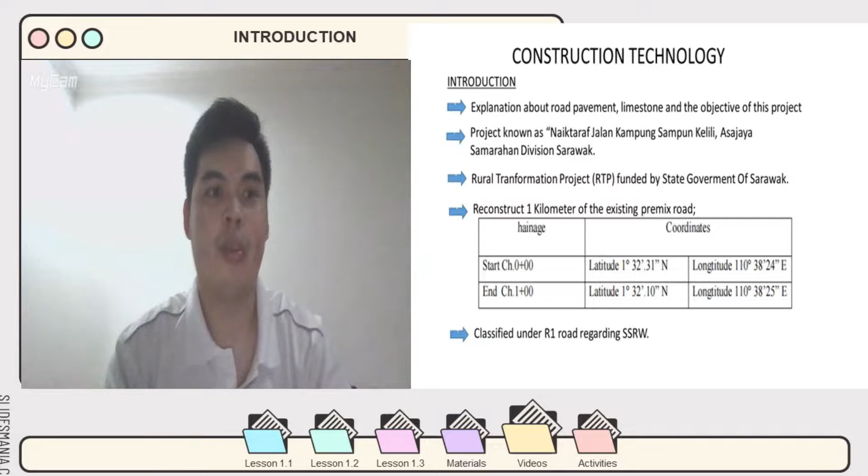Next, I will talk about the project description. This is a construction of an existing 1 kilometer R1 one-lane single carriageway road serving the local traffic with no access control, connecting Kampung Sampun Kelili to Kampung Jugu. As for the road dimension, it consists of 1000 meters times 5 meters, which is 1 kilometer by 5 meter width of road.

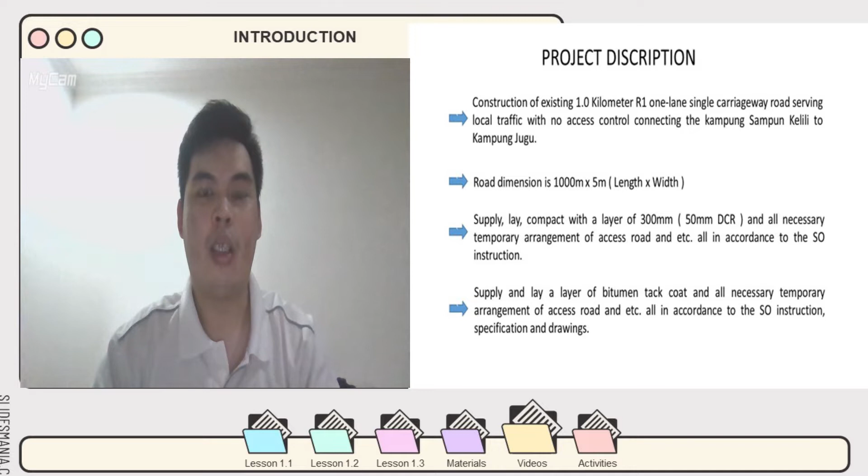To supply, lay and compact a layer of 300 mm 50 mm DCR and all necessary temporary arrangement of access road, etc., all in accordance to the SO instruction. Supply and lay a layer of bitumen tack coat and all necessary temporary arrangement of access road, etc., all in accordance to the SO instruction, specification, and drawings from the consultant which is elected. Next, I would like to pass my slide to Madam Gostia.

Literature review. The purpose is to give more thorough understanding regarding the physical and chemical properties of the limestone, and give an in-depth inside look of the pavement and the specification that they have met in the same way that specifications have been drawn up for road making material already in use. Number 1, limestone. Sedimentary rock that is mostly composed of calcium carbonate and is a bedded carbonate rock. Alkaline with pH of 12.4, utilized in a wide range of industrial applications, including water treatment, asphalt, anti-stripping, and soil stabilization.

Number 2, formation of limestone. Limestone is made up mostly of calcium carbonate formed on the seabed from the remnants of seashells and other marine animals. These animal remnants create hard beds rich in calcium carbonate. As a result of heat and pressure, this process changes the calcium carbonate in limestone, resulting in marble.

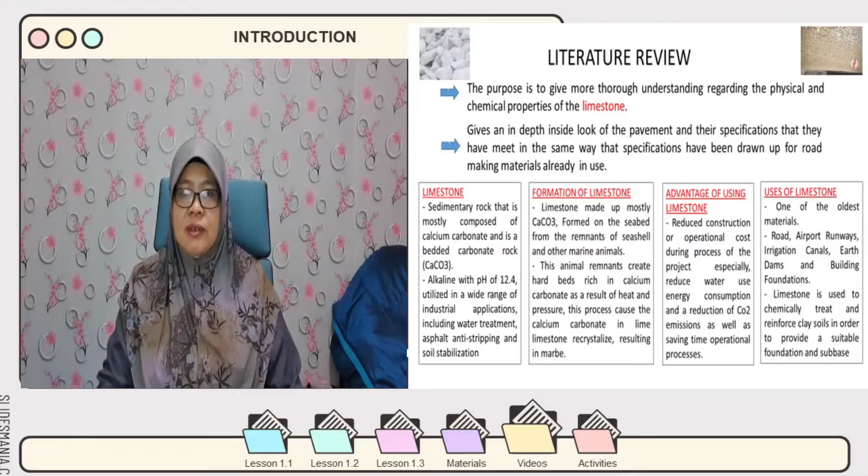I'm Jason Josh. I would like to continue the next topic for our project, which is about potential impact. There are two types of impact. The preliminary impact is a pre-construction impact. This stage is land acquisition involving private-owned land, which potentially affects the socioeconomy and livelihood of the local community in the areas. So land acquisition, as we know, is sensitive and needs to be dealt with

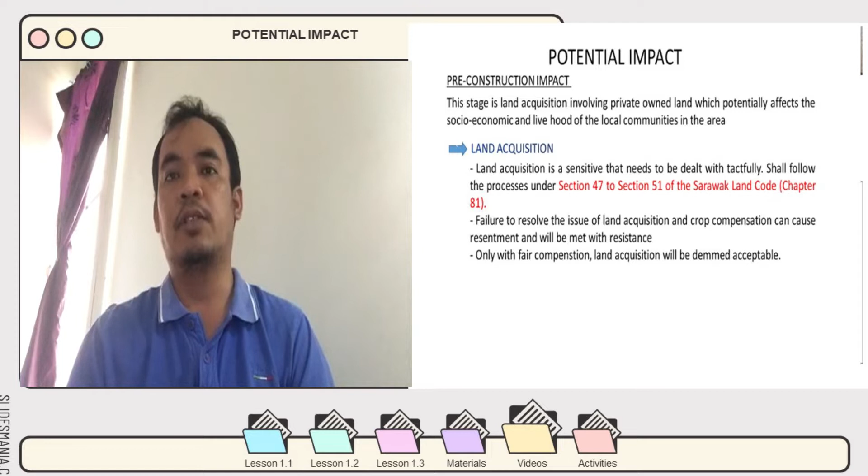tactfully. So when dealing with this issue, we shall follow the process under section 47 to section 51 of the Sarawak Land Code, Chapter 81. For every land acquisition we must refer to this Sarawak Land Code to resolve the problems regarding land acquisition. Failure to resolve the issue of land acquisition and crop compensation can cause resentment and will be met with resistance. So only with fair compensation will land acquisition be deemed acceptable.

During construction, the severity and magnitude of impact shall be assessed based on acceptable matrix, taking into account all possible impacts such as short-term, long-term, and accumulative effects. To assist in the assessment of specific impacts, appropriate mathematical and software models shall be used where necessary.

There are several impacts that our group have highlighted. One of it is air pollution. Air pollution in the form of fugitive dust emission can occur during land preparation, such as earthwork, and during construction. For this project, there are several principal project activities during the construction stage that could be potential sources of air emission, which could potentially deteriorate the ambient air quality surrounding the project site.

The second impact is noise level. Noise arises from activities involving machineries such as bulldozer, excavator, and dump truck. This is a similar situation for every construction activity throughout the construction period in order to complete the project.

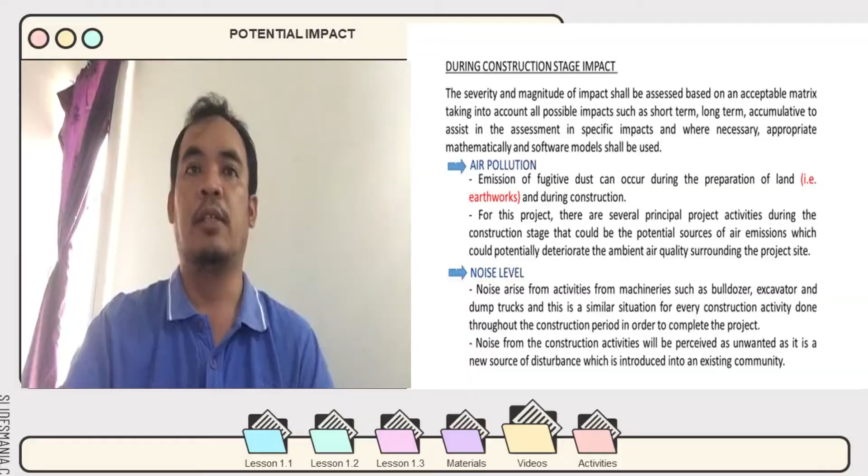The next impact is water pollution. Water pollution arises from surface runoff and soil erosion from earthwork activities, which increase the concentration of total suspended solids in the receiving water courses, resulting in the degrading of water quality.

The next impact is water flooding. This identifies problems that may contribute to flooding events during construction activities, such as blockage and/or diversion of drains and streams during construction, and also inadequacy of culverts and bridges.

The next impact is waste management. The project activities during the construction stage involve site clearing, earthwork, and construction of infrastructure.

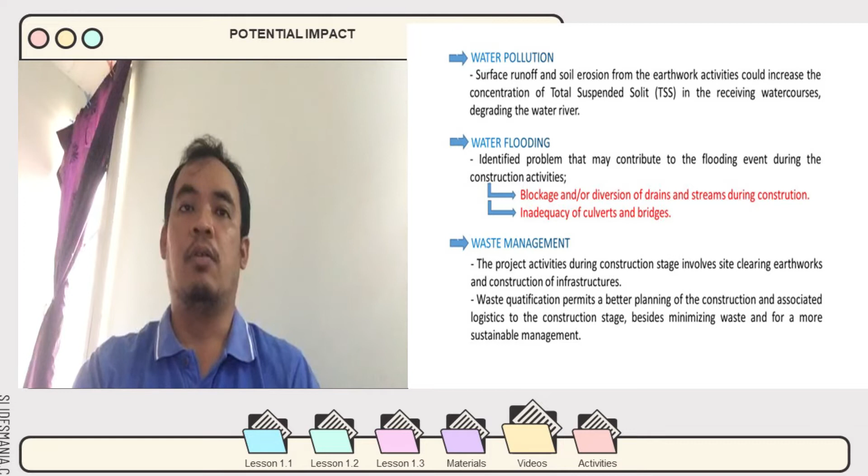Waste quantification permits better planning. So a few principles of road upgrading have been considered to quantify the maximum amount of waste that could be generated, such as number one, clearing of biomass along the alignment and for the proposed workers camp site office; and number two, site clearing along the right of way (ROW), approximately 50 meters in width, where the size of the width has been determined based on the area for earthwork activities.

Number three is the excavated material reused for backfilling. Number four is machinery maintenance, and number five is solid waste generated by construction workers.

The next impact is employment opportunities. These working opportunities arising from construction activities constitute a potential positive impact if priority is given to communities living in the surrounding areas, meaning that if no foreign workers are involved in these employment opportunities, it will be beneficial to the surrounding community.

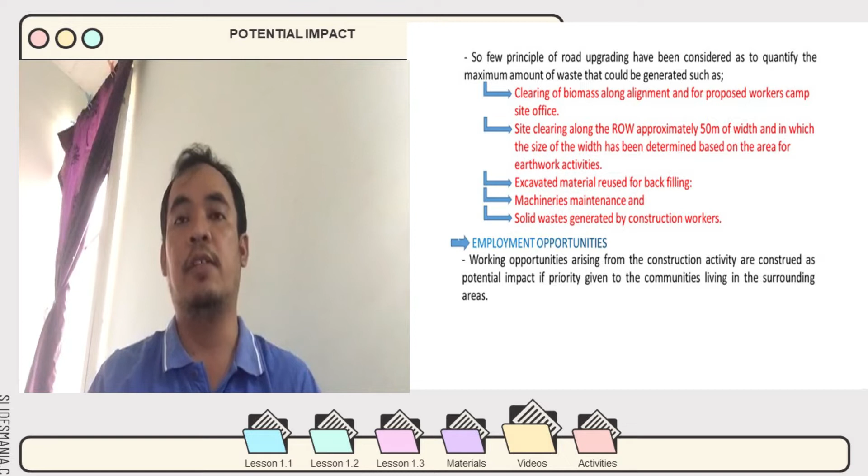During the construction stage, traffic volume will increase on the road, with additional traffic count from the movement of heavy vehicles and machinery during site clearing and removal of earthwork.

Last but not least, the impact for this stage is occupational safety and health. It is important that project implementation is accompanied by adequate safety consideration, which is crucial for workers on site.

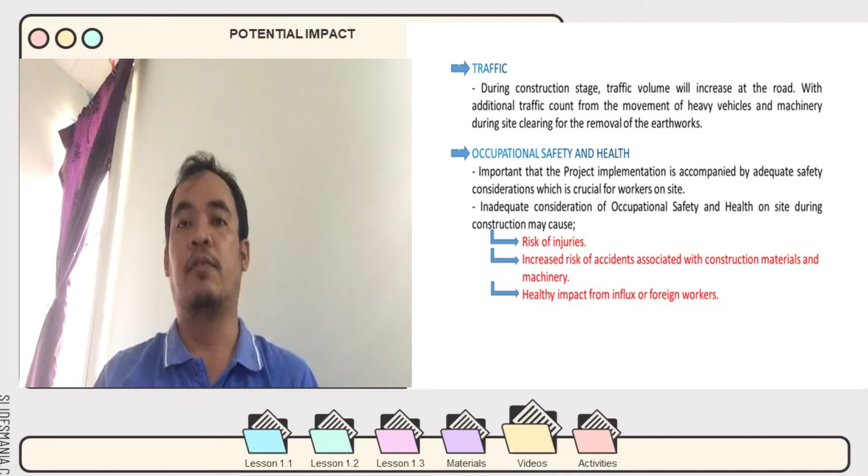Inadequate consideration of occupational safety and health on site during construction may cause, number one, the risk of injuries; number two, increased risk of accidents associated with construction material and machineries; and number three, health impacts from the influx of foreign workers.

I'm Ganibi Jali. I would like to present mitigation, measures, and monitoring. These are several guidance documents that have been referred to, such as Guidelines for Environmental Noise Limit and Control by the Department of Environment (DOE), and Manual Panduan Pemeriksaan BMP untuk Kawalan Hakisan dan Sediment.

Also referred to are the Guidance Document for Addressing Soil Erosion and Sediment Control Aspects in the Environmental Impact Assessment (EIA), the Occupational Safety and Health Act 1994, the Occupational Safety and Health Regulations for Factory and Machinery, the Local Authority Ordinance 1996, and other relevant guidance documents by regulating agencies.

First is mitigation measure during pre-construction, which is land acquisition. A dialogue session with the affected landowners needs to be done to clarify and alleviate any misunderstanding the community might have on the land acquisition and crop compensation project component. Other relevant authorities such as land survey officers and other local authorities should be present at the dialogue session.

A detailed boundary survey of the proposed upgrading of the road should be conducted prior to the road construction activities. Once the land acquisition plan has been finalized, the proposed road corridor would then be subjected to Section 47 of the Sarawak Land Code, where a notice would be put up at the land office.

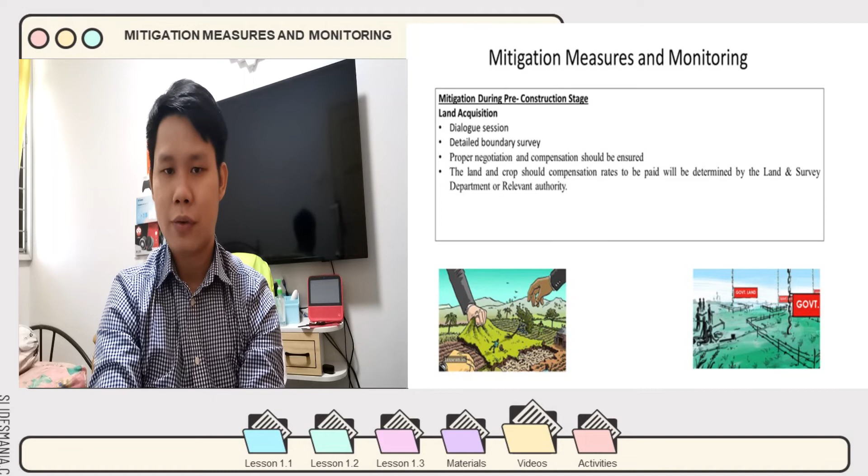Second mitigation is the mitigation during the construction stage. First is tarping: construction material, open stockpiles, and excavated material shall be covered when left overnight on site to avoid dust dispersion. Watering of construction material, open stockpiles, and excavated material shall also be done to avoid dust dispersion.

Second point is noise mitigation. Construction activities, namely site clearing, earthwork activity, and construction of infrastructure, should be confined to daytime, 8 to 5 p.m., to minimize noise impact, and a temporary noise barrier should also be installed.

Third is water quality. There can be an increase of TSS concentration in nearby water bodies due to construction activities such as site clearing and earthworks. This can be avoided by capturing surface runoff through earth drains and channeling the runoff into a sediment basin prior to discharge into the nearest waterways.

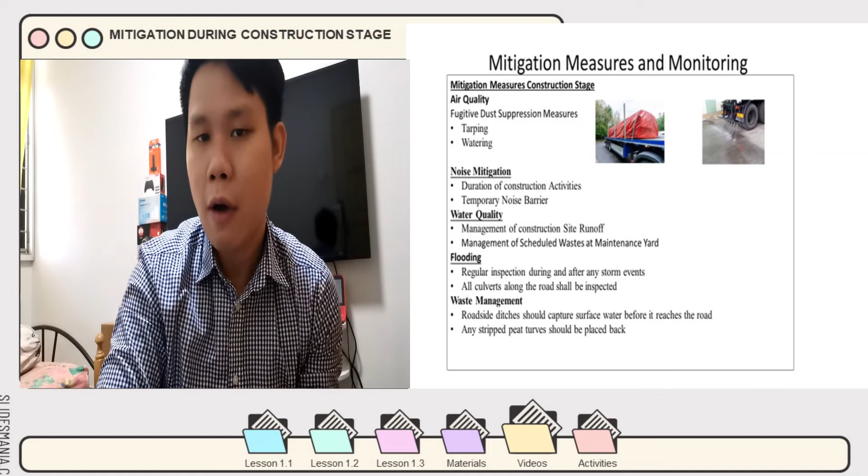The earth drains along the road leading to a water course shall be regularly inspected, and any clogging should be cleared immediately. Also, a designated area for maintenance of machinery shall be provided for the containment of possible spillage or leakage of used oil and lubricant.

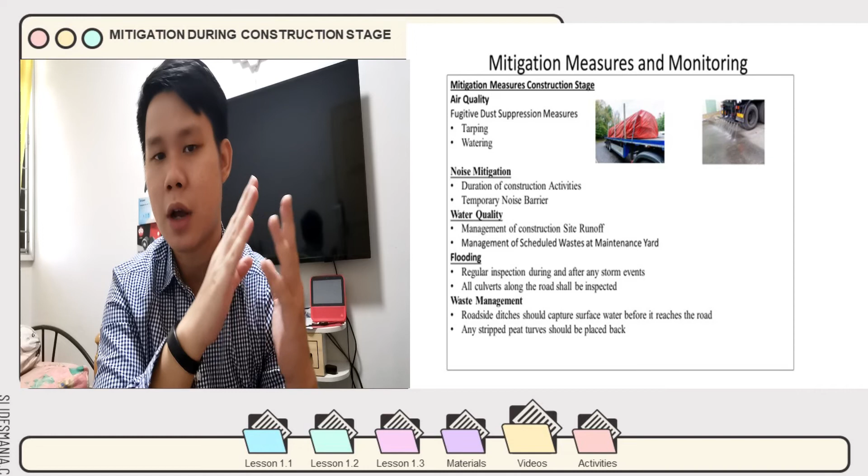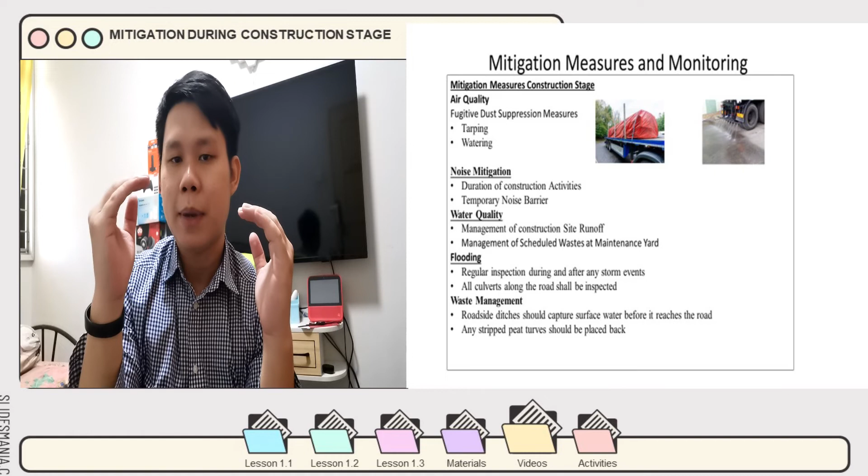For flooding mitigation, regular inspection during and after any storm event with substantial runoff that may exceed the capacity of the sediment basins is required, and all culverts along the road shall be inspected and monitored after heavy rainfall events to prevent blockage. This leads into mitigation for waste management.

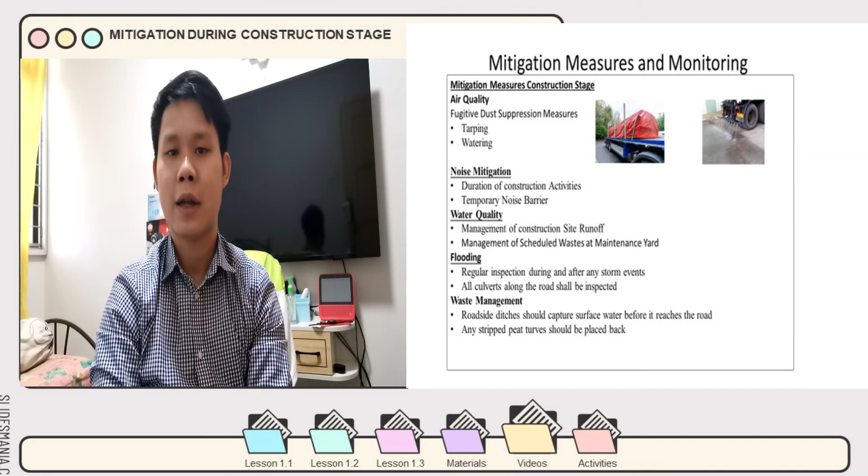Roadside ditches should capture surface waters before they reach the road. Interceptor drains should be shallow with a flat bottom. Any stripped peat or turf should be placed back on the invert and sides of the ditch to assist regeneration.

Socioeconomic public concerns are focused on the social impact during the construction stage, which include public health, disruption to daily lives from construction activities, safety and security of the public residing near the project site, and employment of locals, which should be given priority according to their capabilities.

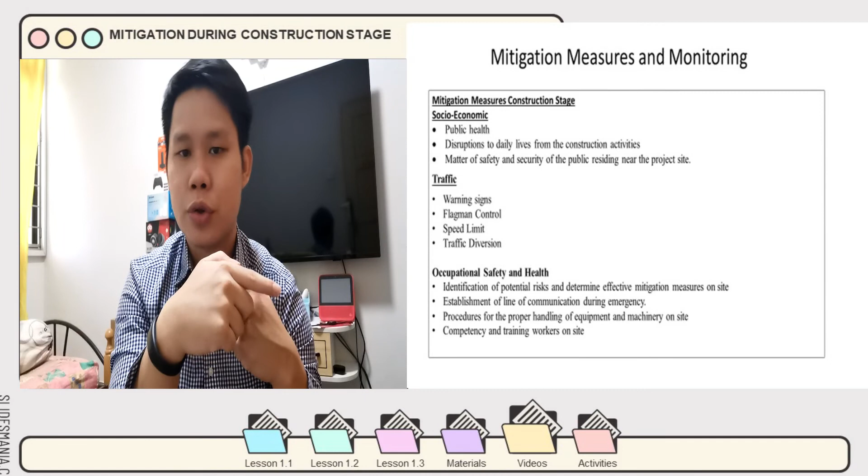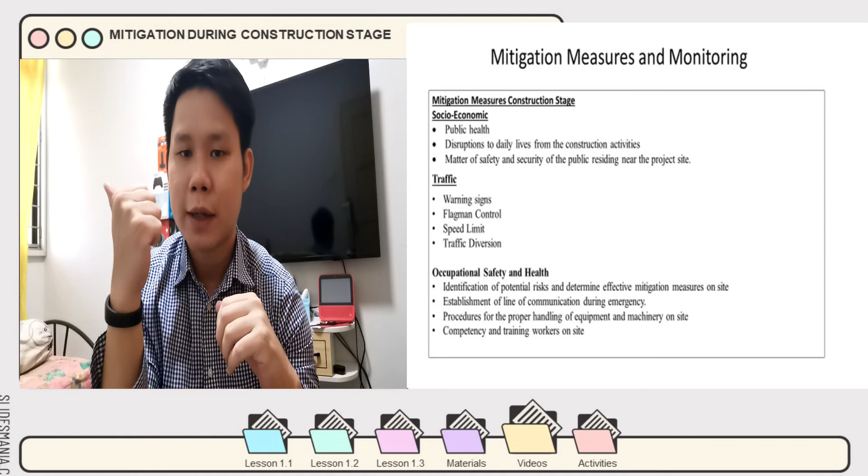Traffic mitigation: construction works at the project site may interrupt existing traffic on the existing road. Proper traffic management will be required to regulate traffic flow during the construction stage. The following mitigations should be implemented during construction: warning signs, flagman control, speed limits, and traffic diversion.

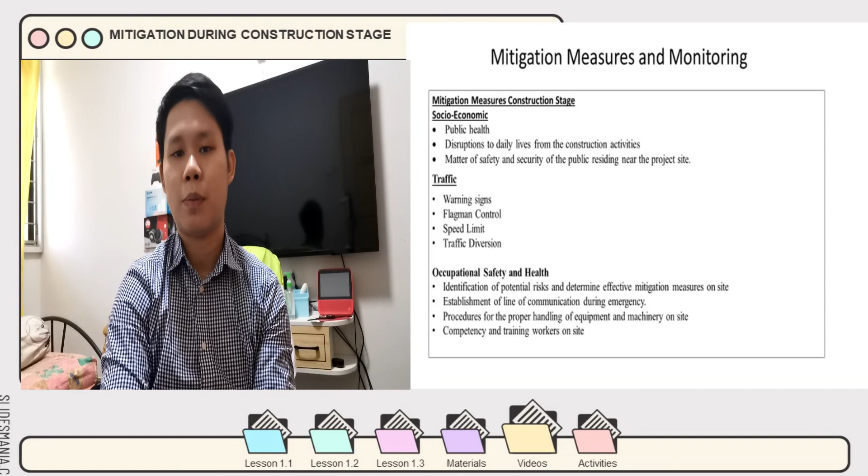The last point is occupational safety and health. The appointed contractor shall prepare a site-specific safety and health plan according to Department of Occupational Safety and Health (DOSH) Malaysia guidelines.

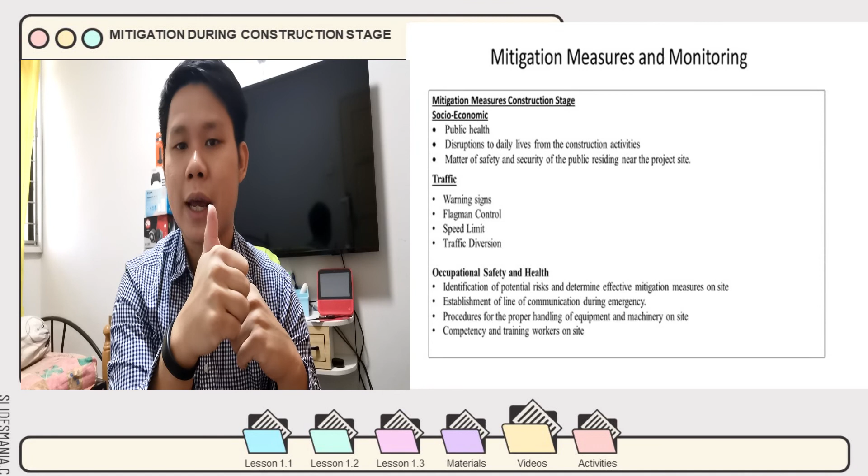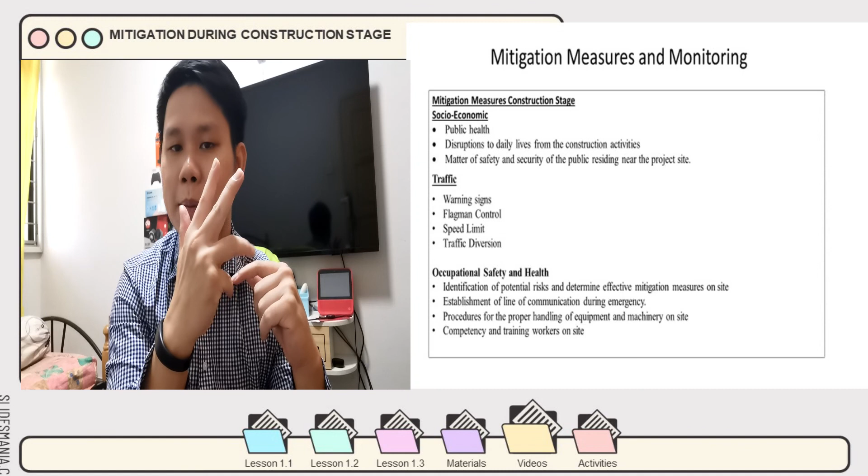The safety and health plan should include identification of potential risks and determination of effective mitigation measures on site, provision of sufficient full-time safety and health officers to monitor and implement the program, implementation of safety and health controls, and establishment of a line of communication during emergencies.